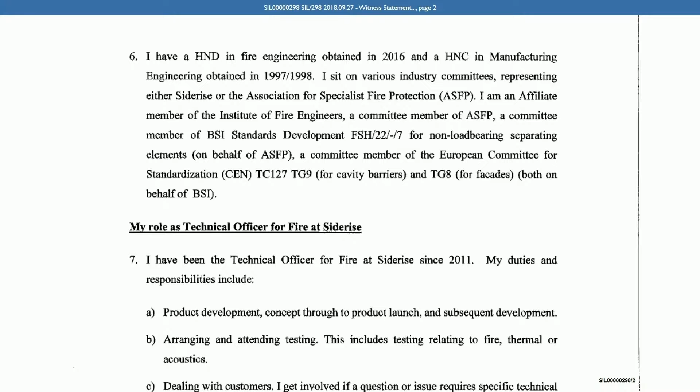Now, if we go back to page 1, paragraph 4 of your witness statement, you tell us that you started in the facade industry in 1998, working for Denver Aluminium Limited. Is that correct? That's correct. And what was your role there? I was a facade designer.

And then in 2000, you moved to Vision Aluminium Limited as a facade design manager. Is that correct? That's correct.

And were you involved in any fire testing in those roles when you were the facade design manager? At Denver, no. When I worked for Vision Aluminium, I was trained at Schuco Facades as being able to design their fire facade system, which was a curtain wall system. And how do you spell Schuco Facades?

SCHUCO, yeah. And then in 2002, you joined Siderise as the product manager and marketing manager for the technical and commercial departments. Is that correct? Yes. Can you explain what that role involved?

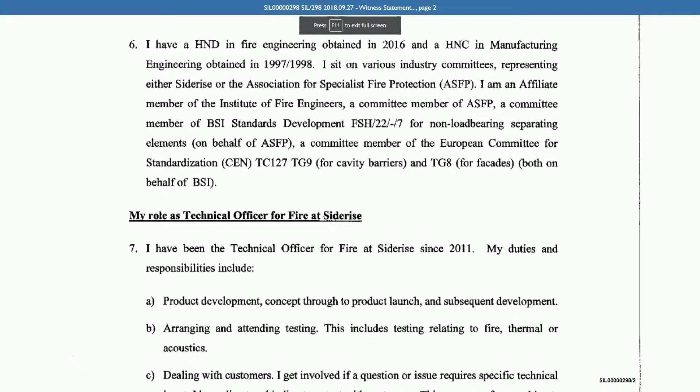And then at paragraph 7, you tell us what your role as technical officer for fire at Siderise has involved, and you describe that role as including product development, arranging and attending testing - including testing relating to fire, thermal or acoustics - and also dealing with customers. You say you get involved if a question or issue requires specific technical input.

Are you still in that role as technical officer for fire at Siderise? The role has evolved. I'm now technical development director for Siderise. When did you take up that appointment? Last January, in 2020.

Did you write or assist in writing any of the marketing literature or installation guidance that Siderise published for its cavity barriers? I would have technically reviewed the documents. So you do a technical review of those documents. Correct.

Just some questions about previous cladding fires. At the time you were involved in the Grenfell Tower project in 2015 - we'll come to that later - were you aware that there was a long history of external cladding facade fires on high-rise residential buildings, both in the UK and internationally? I was aware of some UK fires that led to the authoring of BR 135 and the development of BS 8414. I was also aware of some fires overseas.

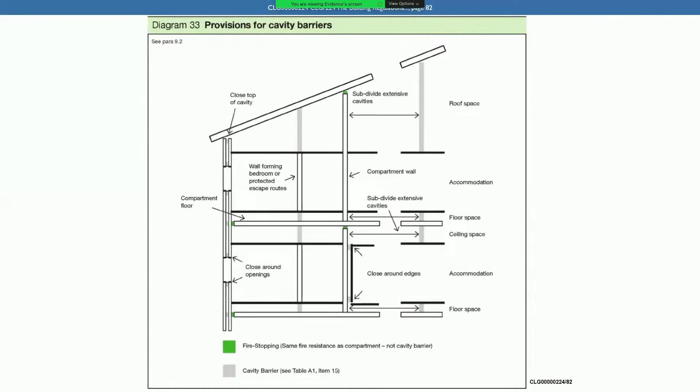If we go to CLG 00000224 at page 82, here we have diagram 33 from section 9 of Approved Document B, dealing effectively with compartmentation. We can see various shaded parts on this diagram, including some green indicating fire stopping, and some grey shading indicating cavity barriers. Can I take it you were familiar with this guidance when you were technical officer for Siderise from 2011 onwards? Yes. And under the key to the diagram, where it says cavity barrier at the bottom, there's a reference to table A1, item 15, in Approved Document B.

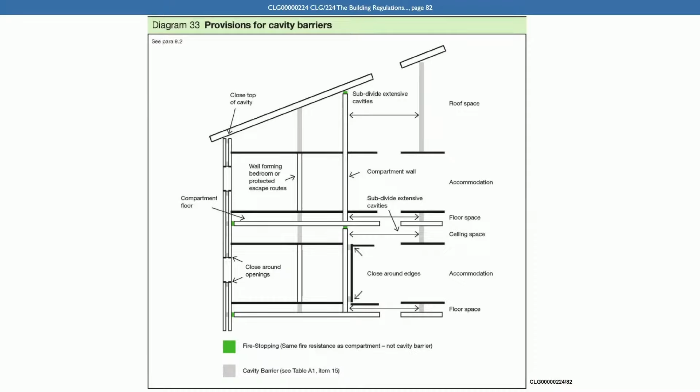I just want to go to that table now. It's at page 124 of ADB. So this is table A1 - we can see the title in green at the top: specific provisions of test for fire resistance of elements of structure, etc. Again, can I take it you were familiar with this table at the time you were technical officer? Yes. Effectively what we see is various different parts of the building, and the table tells you what the fire resistance elements need to be for those parts of the structure. That's correct, isn't it?

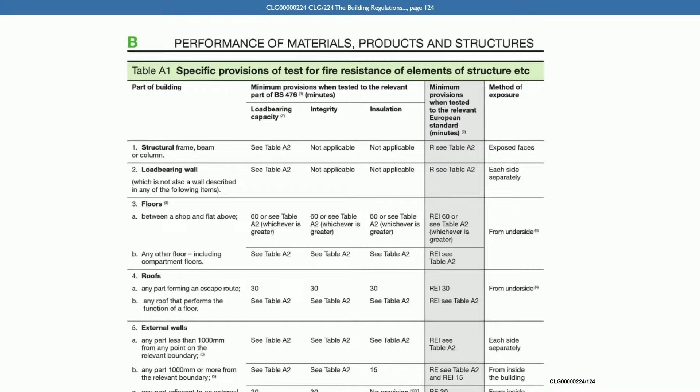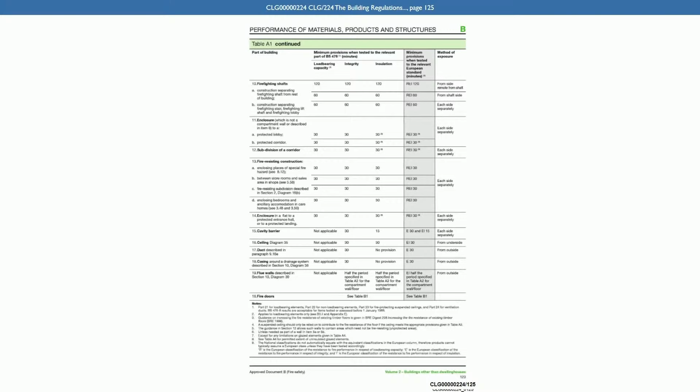Yes, it is. If we go over the page, we can see at the top it says part of building, and then the heading minimum provisions when tested to the relevant part of BS 476. There's a little footnote, which we'll come back to. It also makes clear in brackets that the figures we're seeing here are in minutes. That's correct, isn't it? Yes, it is.

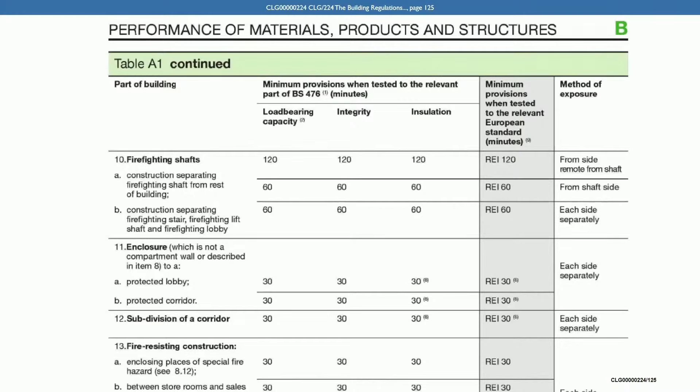And then if we go down to item 15 in this list, we get the reference we saw earlier in diagram 33, taking you to cavity barriers. We can see there, as well as at the top of the page, that cavity barriers need to have 30 minutes integrity and 15 minutes insulation. That's correct, isn't it? Yes, it is.

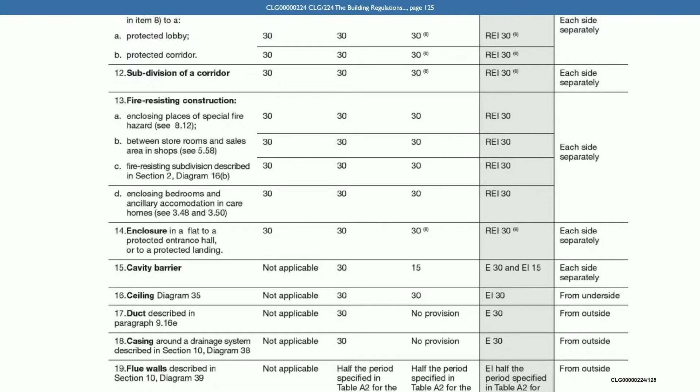Yes, thank you. So you can see the load-bearing capacity column isn't applicable because cavity barriers are not load-bearing, are they? No, they're not. And so the requirements of ADB were 30 minutes integrity, 15 minutes insulation. And then that footnote at the top, which relates to the part of BS 476 that's applicable, if we go down to that footnote 1 at the bottom of this page,

we can see in the notes there, number 1, what it does is it tells you which parts of BS 476 may be applicable. You've got part 21 for load-bearing elements, part 22 for non-load-bearing elements, 23 for fire protecting suspended ceilings, and 24 for ventilation ducts. Do you see that there?

Yes, I do. Now it's right, isn't it, that BS 476 part 20 is the general British standard, which sits with those ones listed there. And that contains general principles relating to the method of determining the fire resistance of elements of construction. Yes, part 20 is the parent test document, and then these are supplementary standards for testing supplementary elements. Yes, thank you. They refer back to part 20. Yes, thank you. That's very helpful.

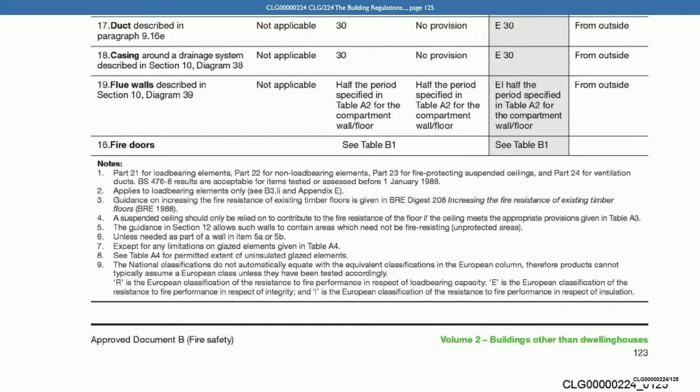Part 22 for non-load-bearing elements, would there be any aspects of that which you would consider relevant to the testing of cavity barriers? Not particularly, because it's dealing with roller shutters and partitions. When I mean partitions, we mean partition walls rather than small elements. The pass/fail criteria in part 22 is referred back to part 20 for the insulation and integrity. It's the same within the EN suite of test standards. They refer back to the parent EN 1363 part 1.

Yes. So we'll come on to see in some of the test reports the way in which the principles in the tests you just explained have been used in the testing of cavity barriers, yes? Yes. Now, just to help the panel and anyone else watching, I want us to be very clear what is meant by integrity and insulation, as we saw in that table. Is it right that integrity, in crude terms, is the ability to contain fire and stop flames and hot gases from physically passing the material in question?

That's correct. A more technical definition, which we see in BS 476 part 20, would be the ability of a specimen of a separating element to contain a fire to specified criteria for collapse, freedom from holes, cracks and fissures, and sustaining flaming on the unexposed face. Do you agree with that?

Yes. And then in contrast, where we talk about insulation, in crude terms, that's about the thermal transmittance of heat, isn't it? And the material's ability to prevent the passage of radiant heat. Yes. And in technical terms, it's described in BS 476 part 20 as the ability of a specimen of a separating element to restrict the temperature rise of the unexposed face to below specified levels. Again, can we agree on that? Yes, we can.

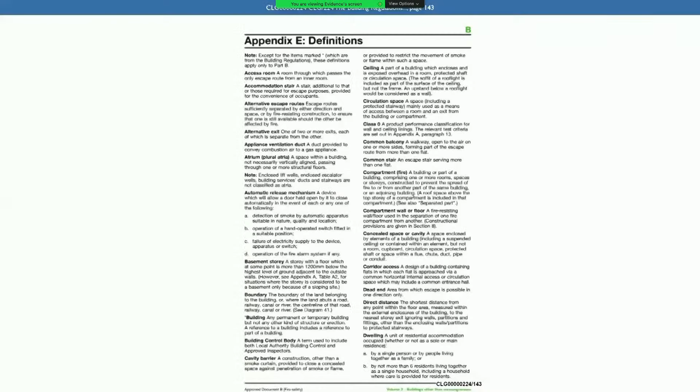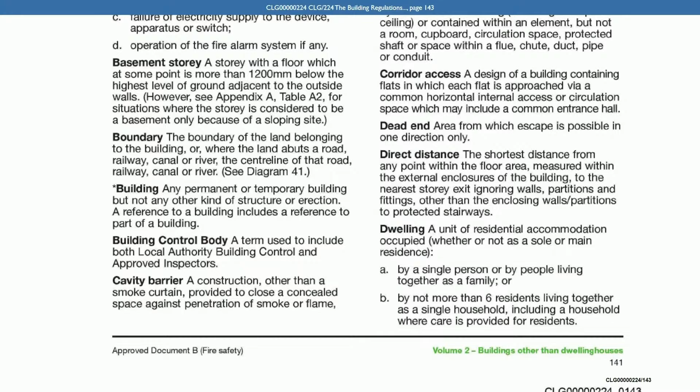This is Appendix E of Approved Document B, where we see some definitions. And I just wanted to draw attention to, at the bottom of that first column, can you see there's a definition there of cavity barrier? Yes. And it says a construction other than a smoke curtain provided to close a concealed space against penetration of smoke or flame. And then if we go up to the top, or provided to restrict the movement of smoke or flame within such a space.

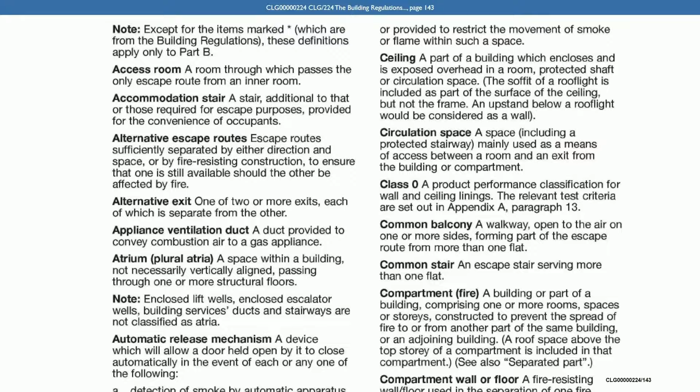Do you see that? Yes. And again, were you familiar with that definition while you were technical officer? Yes, it was. Now, I'm going to ask you in detail in the next section of my questioning about the testing which Siderise carried out on its open state horizontal cavity barriers, those with an intumescent strip. But before we do that, I just want to remind the panel and the listeners exactly what these barriers are.

If we can go to Dr. Lane's phase 1 report, this is BLAS 8, page 42. And here we have two helpful figures. We can see at the top at figure 8.45, this is one of the horizontal intumescent cavity barriers as installed at Grenfell Tower, yes? Yes, looking at the picture, yes. Yes. And we can see an extract from Siderise's product literature just below that in figure 8.46. And again, that is an open state horizontal cavity barrier, yes?

Yes, it is. And I just want to be absolutely clear what these are. So you can see it from the label in the top picture. It states there in the label, black weather-resistant polymer film encapsulating leading edge, continuous high-performance intumescent strip installed behind this film. So is it right that at that leading edge, what you get with these barriers is a high-performance intumescent strip, yes? Yes, it is. And the purpose of that strip, is this right, is that upon heating, that strip expands to fill a gap that has otherwise been left within the cladding system?

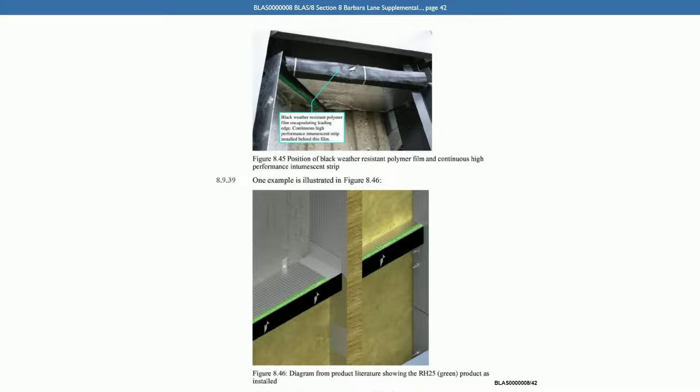Yeah. Now, as I've said, I'm going to focus a lot of my questioning this morning on the testing of these open state cavity barriers, these intumescent cavity barriers. At this point, can we just look at Mr. Swales's witness statement to the inquiry? This is at SIL 306. Can you just confirm that Mr. Swales is the Chief Commercial Officer at Siderise, yes? Yes, that's correct. And this is his witness statement to the inquiry. And he tells us in this statement that he's been Chief Commercial Officer at Siderise since 2013. For the transcript, that's at paragraph 5 on page 2. I want to look first with you at page 11, paragraph 44.

So he says, prior to 2006, Siderise's cavity barriers were verified by the Loss Prevention Council. We'll come back to that in a moment. And he says the use of rain screen was still relatively uncommon in the early 90s. Consequently, the demand for dedicated cavity barrier products was infrequent/negligible. Due to the paradox of cavity barriers needing to be installed with an air gap to maintain ventilation versus the integrity criterion required for compartmentation, the advice at the time from the Loss Prevention Council was that it was not possible to satisfy both requirements.

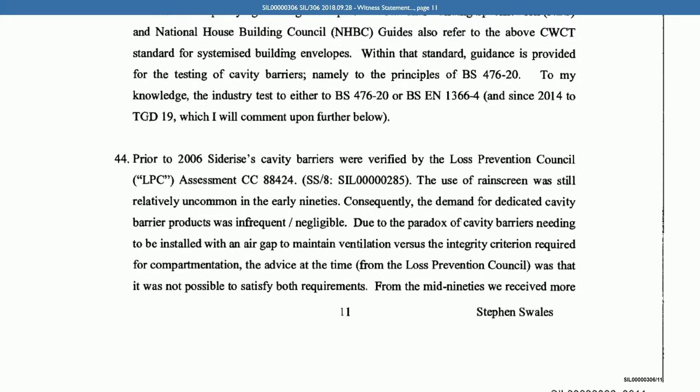And then he says, from the mid-90s, we received more inquiries for this type of application. And he says, as such, in July 1997, I requested that the LPC, the Loss Prevention Council, confirm their position. And then he refers to a document, which I'll take you to in a moment. This was used to support the use of an ad hoc assembly with standard cavity barriers fitted to leave a 25mm gap. From this time to 2002, from recall, there were a small number of projects, literally one or two, where we supplied product for a, quotes, rain screen application.

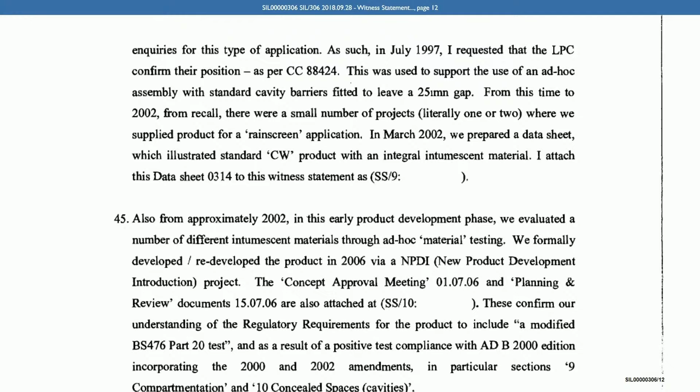And then he goes on, in March 2002, we prepared a data sheet which illustrated standard CW curtain wall product with an integral intumescent material, and he attaches that data sheet. And then if we go on and read from 45, he says also from approximately 2002, in this early product development phase, we evaluated a number of different intumescent materials through ad hoc material testing. Now, just pausing there, is it right that from around 2002 onwards, when you first joined Siderise, the company was beginning to develop open state cavity barriers for use in rain screen applications? Yes.

And based on your own involvement in the industry in the mid-90s, were you aware of a growing demand for such a product? In the mid-90s, I was involved with predominantly curtain walling. The companies I worked for, we were curtain wall specialists, not rain screen specialists. I see. So approximately when did you start to become aware that there was a growing demand for open state cavity barriers in the market? When I joined Siderise. Were you aware, after you joined Siderise, that Siderise had sought advice from the LPC, the Loss Prevention Council, about these open state cavity barriers? Yes, I was.

We're going to go to that letter from the LPC in a moment. But just before we do that, we saw in the first sentence of paragraph 45 that Mr. Swales was referring to ad hoc material testing of different intumescent materials. Can you help us? What, if any, involvement did you have in such ad hoc testing of those intumescent materials? Very little in the very early days. It was more 2006 onwards, I was more involved with testing. Right. So do you know much about what that ad hoc testing was of different intumescent materials? Not in the very early development phase. Okay.

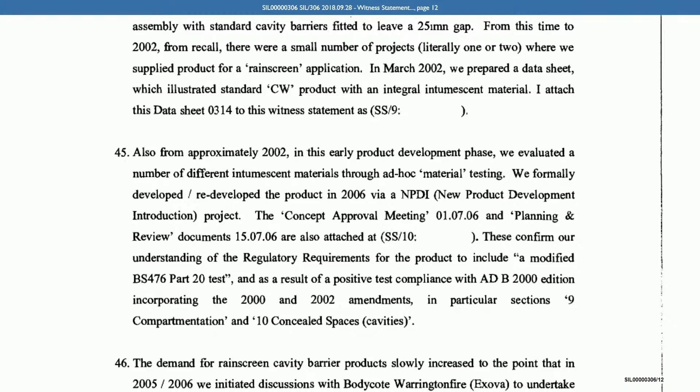Now, if we go back to Mr. Swales' witness statement, looking at paragraph 45 on page 11. In the second sentence of paragraph 45, he says, we formally redeveloped the product in 2006 via an NPDI, New Product Development Introduction Project. And he goes on to say that there was a concept approval meeting on the 1st of July 2006. Can we just look at the agenda for that concept approval meeting? It's SIL 402586. Now we can see there the heading and the date, 1st of July 2006 on the right-hand side. And we can see that the meeting was called by you, and you appear to be the note taker as well, yes? Yes.

And the attendees included Steve Bond, Technical Director, and Chris Mort, Technical Manager. Was it just the two of you at this meeting? Yes, it was. And we can see from the agenda topics that you were responsible, we can see the initials CM, for application description. That's the second one down. And then in the fourth one down, statutory regulatory requirements has also got your initial next to it. Is that correct? Yes, it does. So were you responsible for the statutory and regulatory requirements around this new product development? Yes.

And then if we turn to page 2, we can see that there's a heading there, agenda topics, and underneath that there's a heading product concept name, and then there's various notes under the discussion, so these appear to be minutes of the meeting. Now the rest of these minutes appear then in a different document. If we turn to SIL 402587, would you agree these appear to be a continuation of the minutes of that meeting? Yes, they do. Thank you.

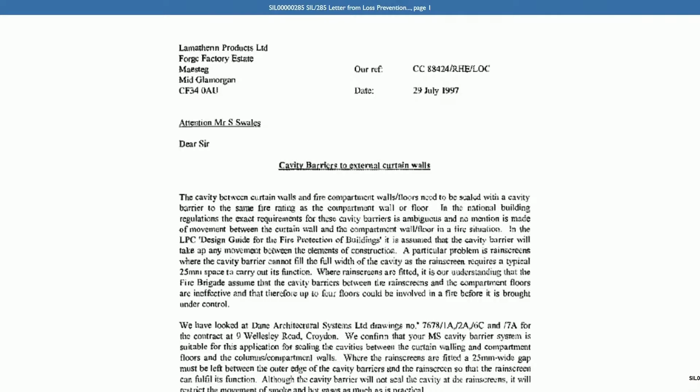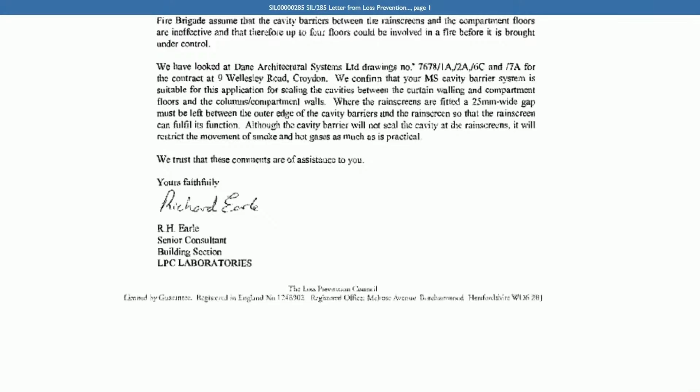Let's turn now to the Loss Prevention Council letter that Mr. Swales referred to in his witness statement. This is SIL 50285. So this is a letter dated 29th of July 1997 that was sent to Mr. Swales. And if we could just see back at the bottom, the author of the letter is somebody called R.H. Earle, who's a senior consultant at the Loss Prevention Council. And I just want to read the first paragraph at this stage.

So the author says, the cavity between curtain walls and fire compartment walls, floors, need to be sealed with a cavity barrier to the same fire rating as the compartment wall or floor. In the National Building Regulations, the exact requirements for these cavity barriers is ambiguous, and no mention is made of movement between the curtain wall and the compartment wall or floor in a fire situation. In the Loss Prevention Council design guide for the fire protection of buildings, it is assumed that the cavity barrier will take up any movement between the elements of construction.

Then it says this: a particular problem is rain screens, where the cavity barrier cannot fill the full width of the cavity, as the rain screen requires a typical 25mm space to carry out its function. Where rain screens are fitted, it is our understanding that the fire brigade assume that the cavity barriers between the rain screens and the compartment floors are ineffective, and that therefore up to 4 floors could be involved in a fire before it is brought under control.

Now, just pausing there, when it states that the rain screen requires a typical 25mm space to carry out its function, is that because in some rain screen systems, it would need to be able to allow the drainage of water behind it and to provide ventilation to the system? That's correct. Now, as to that information about how the fire brigade viewed cavity barriers and their effectiveness in a rain screen system, can you help us? To what extent was that taken on board by Siderise when developing its products?

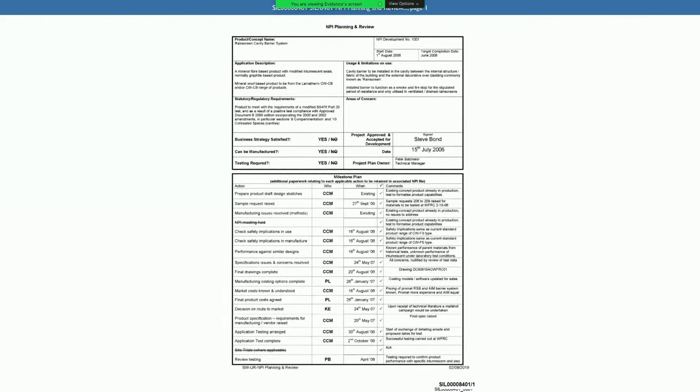Yes, thank you. Now, just sticking with this new product information planning, if we can turn to a document SIL 408401. This is a NPI, New Product Introduction Planning and Review sheet, dated the 15th of July 2006. Now, do you remember completing this document? Yes, I do.

And if we look at the project owner, it had changed to Peter Batchelor. Yeah. This was finished when I had left the business. I see. So you began this and then he finished it off? Yes. When you moved to Hilti, yes? Correct. And then we can see identical wording on the left-hand side, third box down, under statutory regulatory requirements, product to meet with the requirements of a modified BS 476 Part 20 test. And as a result of a positive test, compliant with Approved Document B 2000 edition, and then it refers to particular parts of that.

Had you done any further investigation between the concept approval meeting and completing this planning and review document as to the suitability of doing some modified BS 476 Part 20 testing? There was discussions between ourselves and Warrington Fire on how we could test a cavity barrier with an intumescent with a 25mm gap. So yes. And can you help us, who were you having those discussions with at Warrington Fire? It would have been with Chris Johnson at the time. I see. So you'd been having some discussions with Warrington Fire about how you could use parts of the BS 476 Part 20 test principles in a test of these intumescent cavity barriers. Yes.

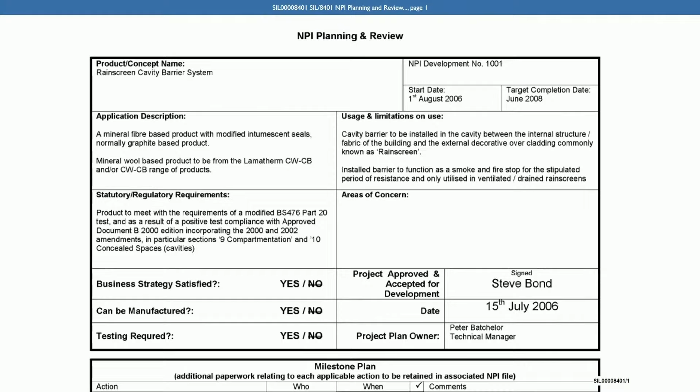And if we just look at this point at your witness statement, paragraph 38, page 10 of your statement. I think we probably already covered this, but you state, 4 lines down, testing to BS 476 Part 20 has been established for many years, though it was recognised as not being ideal, as the standard cannot be applied directly to open state cavity barriers. And that's for the reason that we've already discussed, is it, that under Part 20 of 476, these open state cavity barriers would automatically fail certain requirements?

Yes, it's the gap gauge issue. The intumescents react on a furnace test very, very quickly, within 10 to 20 seconds of ignition of the furnace. So it's that initial, before you start the furnace, you have an open gap. So technically, you shouldn't start the furnace with an open gap, because of the health and safety condition requirements. Yes, I see. And we're going to come on to look at some of the test reports in a moment to see what data you were getting from that.

Mr. Swales says in his witness statement, we don't need to go to it, but for the transcript, that's at paragraph 39, that to his knowledge, Siderise were the first in the industry to test open state cavity barriers. Is that your understanding as well? Yes. So when you were doing this, there was no precedent for testing open state cavity barriers when you were embarking on this project? Not that I was aware of.

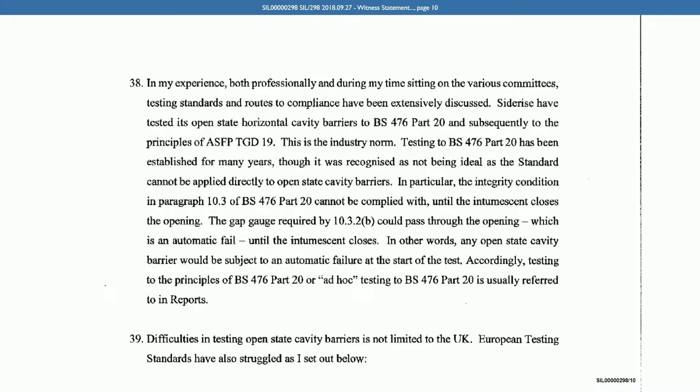I can't particularly recollect any specific discussions. Did you ever, or can you recollect ever having any discussions with anybody within government or anybody who was responsible for Approved Document B about how satisfactory it would be to test in this ad hoc way? No.

So does it follow that you were reliant on the advice you were getting from Exova in testing in this way? That's correct. Yes, thank you.

And if we can look back now at Mr. Swales's witness statement, paragraph 46 on page 12. He tells us there in the first lines, he says the demand for rain screen cavity barrier products slowly increased to the point that in 2005, 2006, we initiated discussions with Bodycote, Warrington Fire, Exova to undertake product testing.

Now, were you personally involved in those discussions? Yes, I was. And he goes on, picking it up in the third line: it took a lot of discussion with Exova to undertake the test, as they were nervous that they could safely permit the testing of an open assembly. And then he goes on, there was no precedent to this test and it was considered ad hoc. And then we're going to look at some of these test reports in a moment.

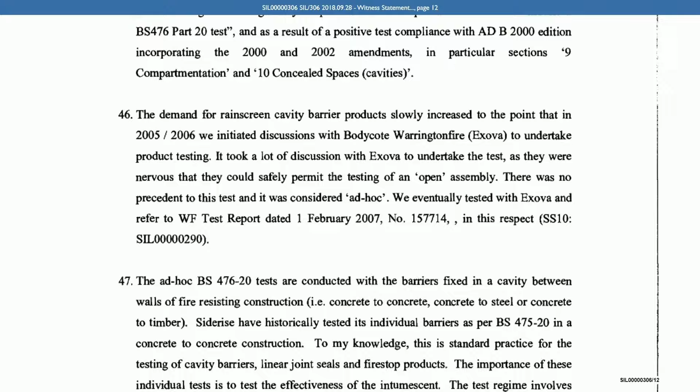Did they ever express any concerns about whether it was appropriate to be testing in this ad hoc way using principles of 476 part 20? It's common to test to use part 20 or EN 1363 part 1 for a test that doesn't fall into one of the other prescribed test standards.

So it's common, yes, I understand that's your evidence, but my question was, did Exova ever express any concerns about whether it was appropriate to be testing in this ad hoc way using the principles of 476 part 20? None at all. So they were entirely comfortable to go ahead with this testing, apart from the health and safety aspects? That's correct.

Well, did anyone from Exova ever express any concern that they didn't want to be seen to be endorsing the safety of open state cavity barriers in circumstances where there was no accepted test for such a product? No.

Now, in a moment, we're going to come to look at a number of the test and assessment reports which were produced for these open state intumescent horizontal cavity barriers by Exova and later by some others. But before we do that, I want to put a number of propositions to you to see what we can agree at this stage. Can we agree that prior to Siderise manufacturing and supplying open state horizontal cavity barriers for use on Grenfell Tower, those products had only ever been tested for insulation and integrity between two concrete lintels or concrete blocks? We are looking at testing an element of material.

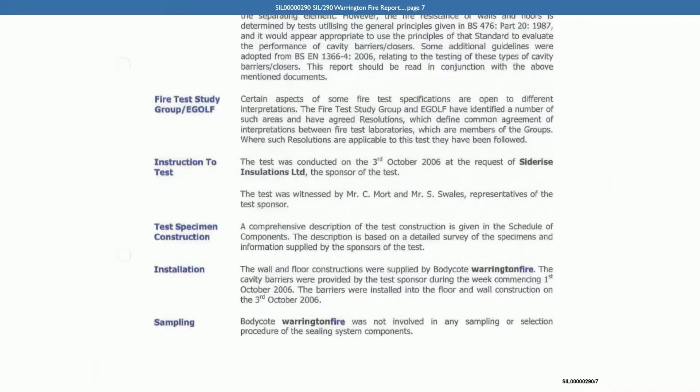And if we can turn back to page 3, there's a section summary of the tested specimens. Here it's explaining what was being tested in these tests.

If we look at the 4th paragraph down, it tells us that specimens C and D, reference Lamatherm CWRS, comprised a mineral fibre based insulation with polyethylene fibre reinforced aluminium foil facings, and had overall dimensions of 225 millimeters wide, 1000 millimeters long, and 75 millimeters thick.

And then it said specimen C, complete with a graphite based intumescent strip retained to one edge of the primary seal by folded returns of support brackets that penetrated the full width of the specimen, and specimen D, complete with a Palusol based intumescent sheet retained to one edge of the primary seal.

So in this description, it's right, isn't it, that it was specimen C and D that were the open state cavity barriers with intumescent strips, yes?

Yes, that's correct. And that's in contrast to specimens A and B, just to note above that, in the paragraph immediately above, they were directly bonded to the damp-proof course and friction fitted, yes? Yes.

And we can see, I read out the dimensions of the intumescent cavity barriers in that 4th paragraph, 225 millimeters wide, 1000 millimeters long, 75 millimeters thick.

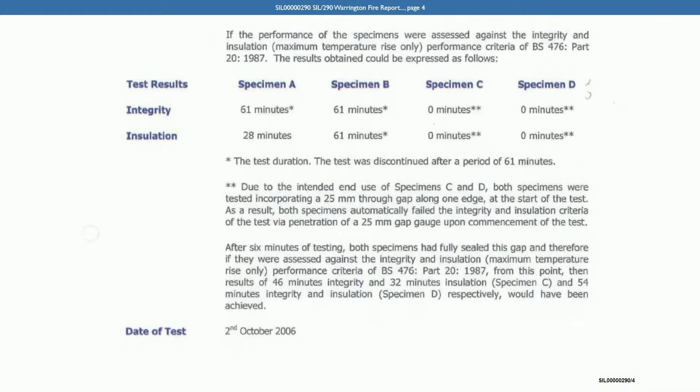And we can see what the performance was that they achieved. And then if we can look at page 28 of the report, we can see there's some limitations. Mr. Chairman, if I can just cover these limitations in this report, perhaps then we could break.

Yes, that's right. So at page 28, we can see at the bottom, it sets out ongoing limitations, and we can see at paragraph 1, it states the results relate only to the behaviour of the specimens of the element of construction under the particular conditions of test. They are not intended to be the sole criteria for assessing the potential fire performance of the element in use, nor do they reflect the actual behaviour in fires.

And then we can see in the next paragraph, it says the results may not be applicable to situations where the joint widths, orientations and supporting construction vary from those tested. And then in the third paragraph, it says, as no movement was induced into the specimens during the test, there can be no evaluation of the performance of the seals where movement is induced in a building under actual fire conditions. So can you just help us, what did you understand that last limitation to mean?

It's a standard clause. It's a standard clause in fire tests, even now. You're testing to get the performance of the element in isolation. It needs further assessing, as it says there, the fire performance of all the elements put together.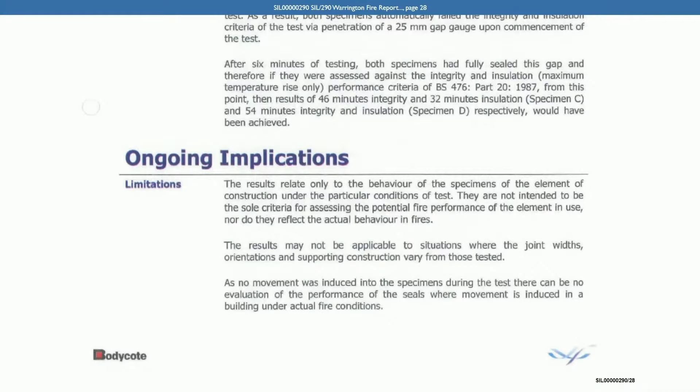Right, I see. And then just to complete what we can see in this report for our purposes, if we go to page 29, the next page at the top of the page, under review, it makes clear that this report covers a test which was conducted to a procedure which is not the subject of any British standard specification, but it utilised the general principles of fire resistance testing in 476 part 20. And it also refers there, and you mentioned this standard earlier, the European equivalent, BSEN 1366. Actually, that's part 4 on linear joint seals, isn't it?

Yes. And is it right that in this test, you used the thermocouple locations from the BSEN 1366 part 4 for linear joint seals?

You use the thermocouple locations on top from that standard, and the heating from BS 476 Part 20, and then you adapted the procedures from the two different standards for this test? We didn't adapt any of the procedures because we do not run the test. Warrington Fire run the test.

We only witness. In terms of thermocouples attached to the product, the thermocouples for EN attached to the product are a copper disc with wires attached and a non-combustible pad of about 30 millimeters square. They are the same or similar to the BS 476. So really, there isn't any difference between the two measuring thermocouples.

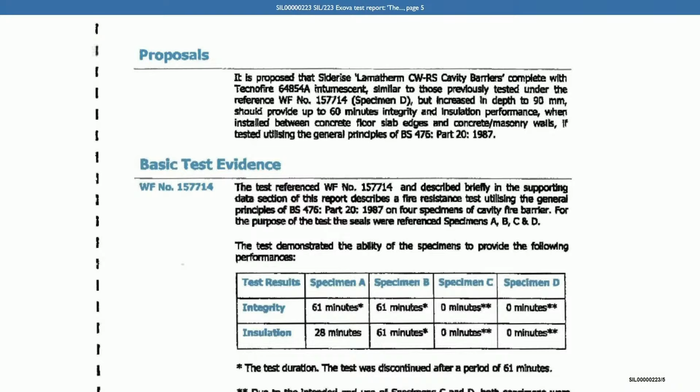Yes? Yes. So again, with this assessment report, it's premised on the basis that the product was held between two concrete slabs, yes? For testing, yes. Yeah. And if we turn to page 7, we can see the report's conclusions. And the basic conclusion was that should the recommendations given in this report be followed, it can be concluded that those cavity barriers, complete with the Tecnofire intumescent, should be capable of providing up to 60 minutes integrity and insulation performance if subjected to a test utilising the general principles of BS 476 Part 20.

And again, the little asterisk caveats this and makes clear that it's after closure of the 25 millimetre wide air gap has occurred. And in brackets, it says after approximately 4 minutes, yes? Yes. So the report is not assessing integrity or insulation performance prior to the 25 millimetre gap being closed, no? No. And again, the report contains a caveat.

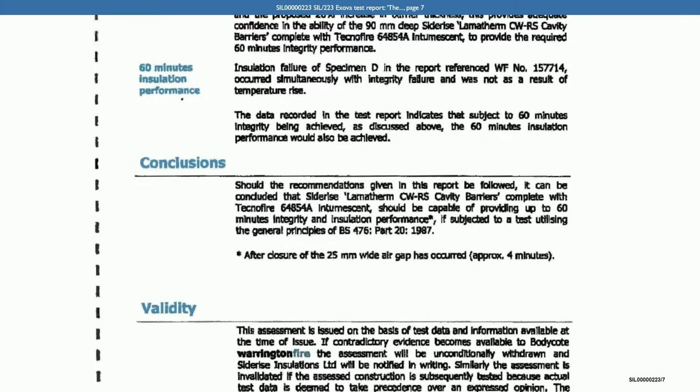If we go to the very last sentence on page 7, under validity, it says the appraisal is only valid provided that no other modifications are made to the tested construction other than those described in this report. So that's an assessment report that's obtained in 2009. Let's move now to another test report. This is SIL 00000224.

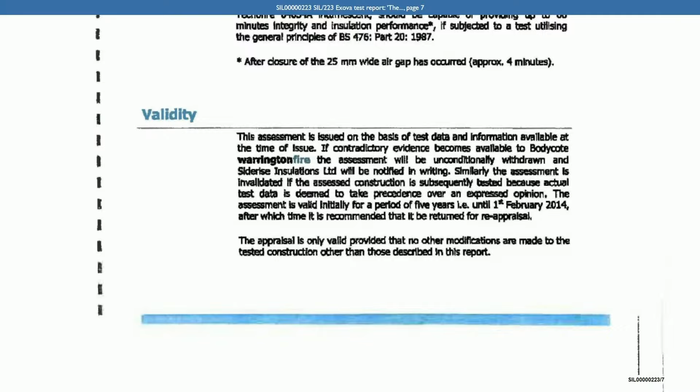And we can see from the title there on the right-hand side, this is fire resistance test utilising the general principles of BS 476 Part 20 on 5 specimens of floor-mounted linear gap seals. And we can see it's dated the 26th of August 2010. And so it would appear that Siderise had commissioned further testing to the principles of BS 476 Part 20, which led to this report being produced. Is that right? That's right.

And if we look at page 2 of the report, under test results, if we zoom in there, we can see that 5 samples were tested. Specimen E at the top there, we can see that that was installed into the cavity on 3 brackets, reference prototype RS, leaving an air gap of nominally 50 millimeters. Do you see that there? Yes. And then specimens F, G, H, and I are all described below that. And they had an air gap of nominally 25 millimeters, yes? Yes. So you're testing the barriers with different widths of air gap, is that correct? That's correct.

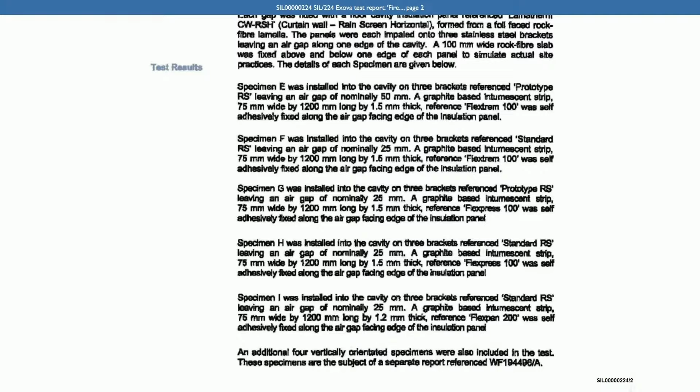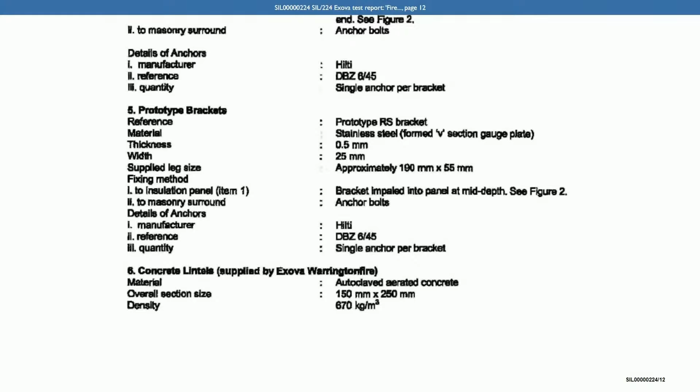And turning just to page 12, we can see at the bottom of page 12, at item 6, again, the apparatus used in this test included concrete lintels, autoclaved aerated concrete, yes? Yes. And then if we turn to page 23, we can see a table of results. So here we can see that all the specimens, when they've been tested to BS 476 Part 20, have got 0 minutes integrity and 0 minutes insulation, and there's an asterisk.

And we can see in the paragraph below the table, in the first paragraph, if we could just go down the page a little, thank you. It says there, due to the intended use of specimens E to I, the specimens were tested incorporating a through gap along one edge of between 25 millimeters to 50 millimeters at the start of the test. As a result, the specimens automatically failed the integrity and insulation criteria of the test via penetration of a 25 millimeter gap gauge upon commencement of the test. So exactly the same as last time, yes? Yes.

And then if we look at the final paragraph below that, it states this: it says between 2 and 3 minutes, specimens G, H and I sealed the gaps. And therefore, if they were assessed against the integrity and insulation, maximum temperature rise only, performance criteria of BS 476 part 20 from this point, then the results are 61 minutes integrity and 23 minutes insulation for specimen G, 61 minutes integrity and 20 minutes insulation for specimen H, and 61 minutes integrity and 27 minutes insulation for specimen I respectively would have been reported.

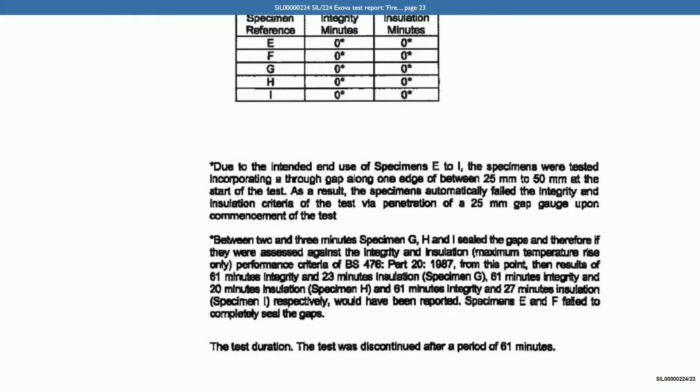Yes, I understand. And then if we go over to page 24 of this test, we can see that exactly the same limitations and disclaimer are placed here by Warrington Fire as before. The results relate only to the behaviour of the specimens of the element of construction and not intended to be the sole criteria for assessing the potential fire performance. And then the results may not be applicable to the situations where the joint widths, orientations and supporting construction vary from those tested. And then it's making clear in that final paragraph under limitations that there was no movement and therefore it can't be evaluating the performance where movement is induced in a building under actual fire conditions, yes?

Yes, those are standard clauses in all test reports. Yes, I understand they're standard clauses, but they're pretty important clauses, aren't they, nonetheless? They're standard clauses in the test reports. You are testing that single element, that single item. Yes. It needs to be further assessed, as I said previously, by a project fire engineer who takes the fire resistance properties and fire reaction properties of all the elements being used in the construction to come up with the correct product. Yes. Can we agree that they're important limitations?

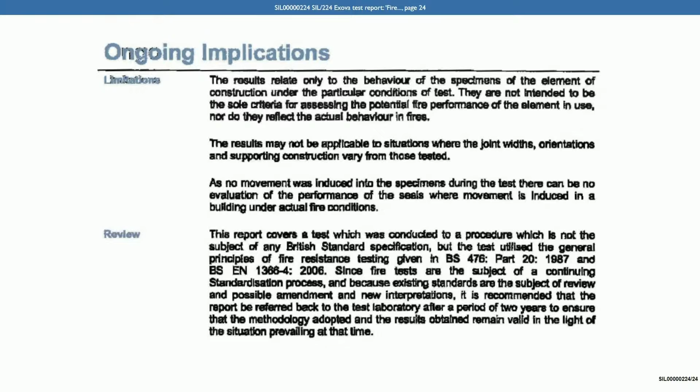Yes. And then in the fourth report, if we go to this now, this is from September 2011. If we look at SIL00000211, under the title, we can see on the top right-hand side, the title is the fire resistance performance of Lamatherm rain screen fire barriers. And we can see below that this is an assessment report again. And we can see it's dated the 20th of September 2011. Now, again, have you seen this report before and are you familiar with it?

Yes. Were you involved in commissioning this report? Yes. And again, it's an assessment report, isn't it? Not new testing, but an analysis and extrapolation based on evidence presented to Exova. Yes. And if we go to page 3, next to objective, what it's saying as the objective for this assessment report is that it considers the expected fire resistance performance of Lamatherm rain screen fire barriers similar to those tested under the references. And those are the two test reports, the first from 2007 and the second from 2010 that we've just been looking at, yes? Yes.

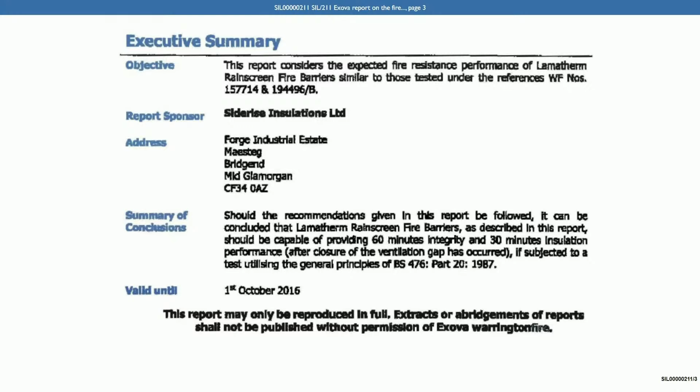And on page 4, we can see the assumptions that this report is based on. And next to supporting construction, it says it is assumed that the assemblies that the cavity fire barriers will be fitted to elements of construction that have at least 60 minutes fire resistance performance in accordance with BS 476 part 21 and 22. So there it's making an assumption that the assemblies that they're going to be fitted to will have at least 60 minutes fire resistance performance, yes? Yes.

And next to installation, 2 down from that, it says it's assumed that the barriers will be installed by competent installers in a professional manner. And then it says the use of third-party certified installers is recommended. Do you see that? Yes.

And it also says it's also assumed that the gap between the end of the barrier and the element of construction is no greater than 25 millimeters, yes?

Yes. And then next to rain screen, below that, it says this report does not consider the fire resistance performance of the rain screen element or whether fire spread may occur as a consequence of collapse or failure of the rain screen. The approving authority or regulator should decide whether it is necessary for the rain screen to be, quote, fire rated, whether it is of an appropriate construction and whether separate test or assessment evidence is necessary.

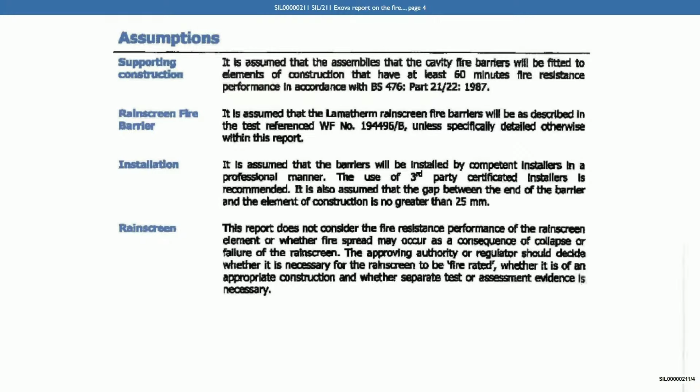Now, were you aware of that caveat at the time in this report? Yes. And if we can turn to page 7 of this document in the top paragraph, we can see it says, it should be noted that due to the performance criteria of the standard, the opening included at the start of the test must result in integrity and insulation failure, irrespective of how quickly the gap was closed, and the approving authority or regulator should therefore consider the acceptability of this situation.

Now, we've seen 2 references there to the approving authority or regulator in this test assessment. Who did you understand to be the approving authority or regulator in this context? On a project where product is supplied, there can be approval by the project fire engineer, could be approval by local building control, could be approval by other consultants. They're responsible for assessing every element. So if you had 5 different manufacturers of 5 different components, it's their responsibility to assess all 5 components to ensure that it meets with the fire strategy.

Yes. Was it Siderise's practice to bring these caveats to the attention of fire engineer or building control officers on projects that it was involved with? We have, yes. When you say we have, does that mean it was your practice to do that as a matter of course? Whenever we were in discussions with a fire engineer, it's a case of this is the product test information. You need to satisfy yourselves that it's suitable for the construction on site, because we're not in control of what is being installed into.

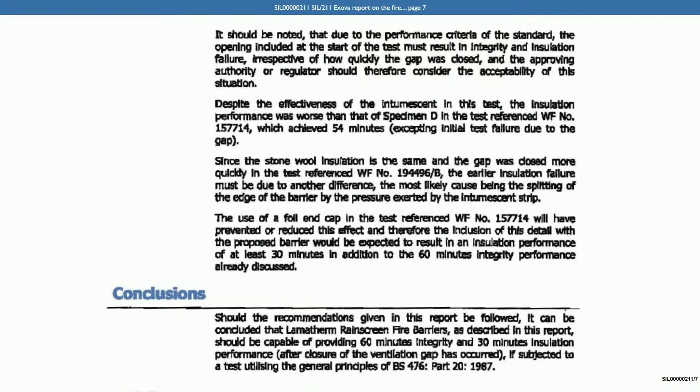Yes. Can we just look at, I want to put 2 pages on the screen side by side from the test reports 2007 and 2010. If we could pull up the 2007 test report, this is page 4 of SIL00000290. Yeah, so if we can have that. And then on the other side of the page, if we can have the 2010 test report at page 3, SIL00000224, page 3. Yes, and it's the last paragraph on both of those pages that I'm interested in.

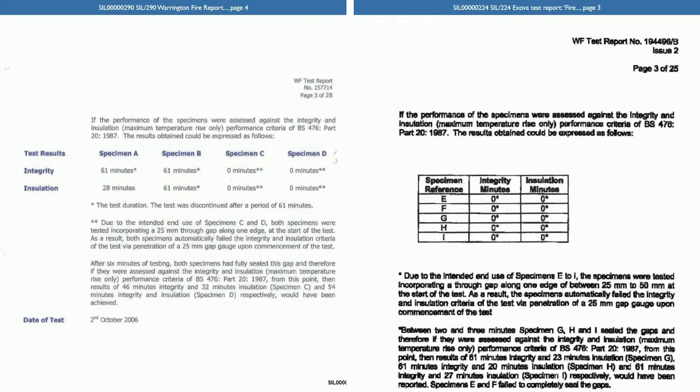So if we look first at the 2007 report on the left-hand side, we can see at the bottom paragraph of the page, the report set out that after 6 minutes of testing, we can see that specimen C has achieved 46 minutes integrity and 32 minutes insulation. And then it's got 54 minutes integrity and insulation, so 54 for both. It's specimen D.

Yes. And then if we look on the right-hand side in the 2010 test report, in that bottom paragraph, we can see that specimen G, this is about halfway down, where it starts saying the results of 61 minutes integrity and 23 minutes insulation. That's specimen G. 61 minutes integrity and 20 minutes insulation, specimen H. And 61 minutes integrity and 27 minutes insulation for specimen I. So those are the figures.

Now, we can see that for insulation, the results were much better in the first test. And for integrity, the results were much better in the second test, yes? Yes. And so is it right that in its assessment report from 2011 that we've just been looking at, Exova combined the favourable integrity results from the 2010 test report, the 61 minutes, with the favourable insulation results from the 2007 test report, 32 and 54 minutes, to conclude that Siderise open state cavity barriers would achieve the 60-30 for integrity and insulation, yes?

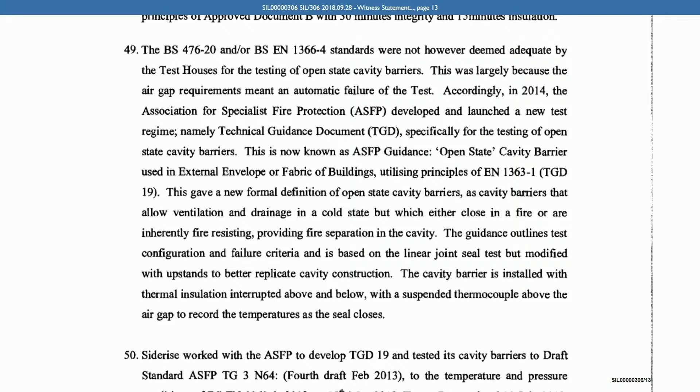Yes, we will go to it in a moment. Mr. Swales goes on to say, at paragraph 50, Siderise worked with the ASFP to develop TGD 19 and tested its cavity barriers to draft standard ASFP TG3 N64, 4th draft February 2013, to the temperature and pressure conditions of BS EN 1363 Part 1 2012 on the 15th of May 2013, and then he gives reference to a Warrington report.

Now, were you personally involved in developing TGD 19? As part of the technical working group for ASFP, yes, along with 11 other members.

And I think that standard that I just read out, BS EN 1363 Part 1 2012, that's the European equivalent of BS 476 Part 20, setting out the general requirements for fire resistance tests, yes? It's a higher standard than BS 476 Part 20.

But if you have a product that is tested to BS 476, you cannot assume it will pass a BS EN 1366 test. If you've got a product that's tested to EN 1366 or similar, then it should pass the BS 476 due to how the furnace temperature is recorded and controlled. In BS 476, it's a simple bare wire.

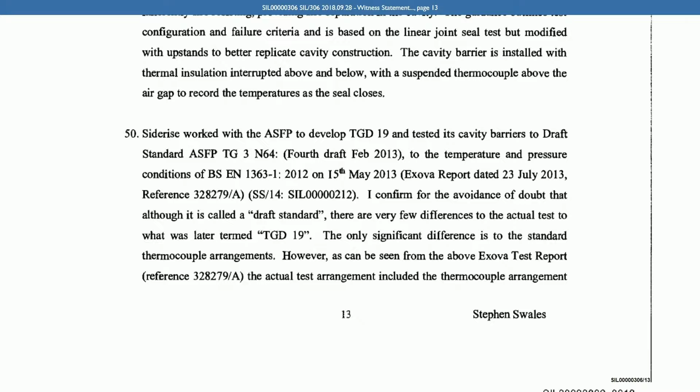In EN standards, there is a thermocouple that is a 100mm square steel plate with a 10mm calcium silicate board, and sandwiched between the steel plate and the calcium silicate board is the bare wire thermocouple. So the amount of energy needed in the first phase of the start of an EN test is 20 to 25% more than required in a BS 476 test. That's a considerable thermal shock increase over BS 476.

I understand. Now, if we go to paragraph 39 of your witness statement, on page 10, you explain there for us some of the difficulties in testing open state cavity barriers.

And what you say in the beginning of that paragraph is, difficulties in testing open state cavity barriers is not limited to the UK. European testing standards have also struggled, as I set out below.

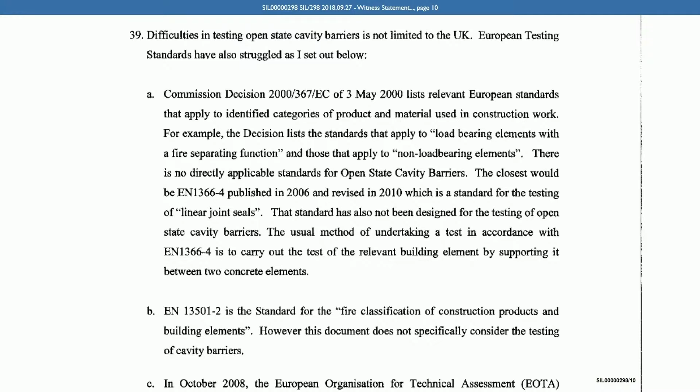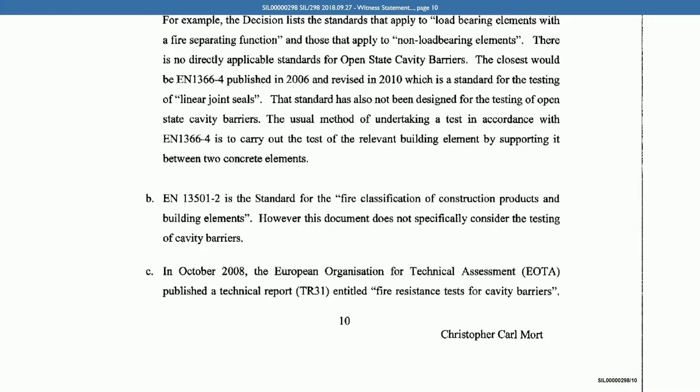I wanted to look at what you say at subparagraph C. You say, in October 2008, the European Organisation for Technical Assessment, the EOTA, published a technical report, TR31, entitled Fire Resistance Tests for Cavity Barriers. As I understand it, TR31 was written because there was no relevant standard for testing cavity barriers. However, that standard, you say, excludes open state cavity barriers. It states at section 1, this method is not applicable to horizontal cavity barriers, e.g. rain screen cladding, because it is difficult, if not impossible, to model the correct thermal exposure and boundary conditions in a fire resistance type test. Such tests should be considered as part of a facades test.

Now, is that the view of Siderise, that it would be difficult, if not impossible, to model the correct thermal exposure and boundary conditions? That is the opinion of the EOTA committee that wrote the TR31. Members of the TR31 committee were also members of the ASFP, who were involved in writing TGD 19.

The difficulty goes back to the fundamental principles of having an open gap on a furnace. How do you measure the temperature above that gap in order to keep the pressure and the temperature in the furnace balanced to allow it to follow the time temperature curve? Yeah, that is the issue.

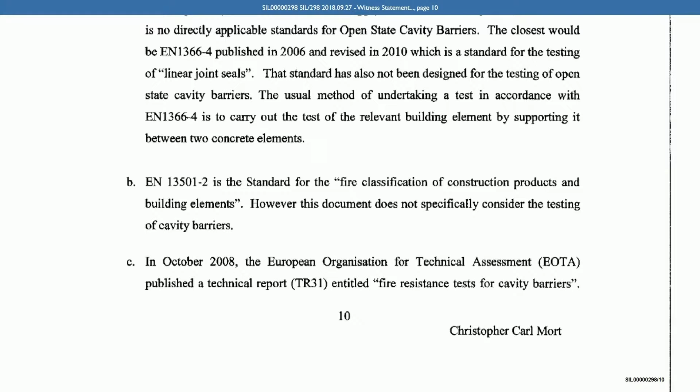Just purely to temperature exposure. Well, let's just go back to that bit of your statement. What's being said there, if we go back to the previous page, bottom of the page. So you say in October 2008 the European Organisation for Technical Assessment published a technical report entitled, and there's the report, and then we go back over.

As I understand it, it was written because there was no relevant standard for testing cavity barriers. However, it excludes open state, and it states at section 1, this method is not applicable to horizontal cavity barriers, e.g. rain screen cladding, because it is difficult, if not impossible, to model the correct thermal exposure and boundary conditions in a fire resistance type test. Such tests should be considered as part of a facades test.

So taking that in stages, did Siderise agree that it was difficult, if not impossible, to model the correct thermal exposure and boundary conditions in a fire resistance type test? No. And why did Siderise take a different view? This was the view of a European committee who were not aware of tests that would be undertaken in the UK in terms of trying to develop products.

Once intumescent reacts and closes the gap, then in effect that is a full seal. Then the full furnace conditions can be controlled.

I see, so Siderise thought it would be possible. Yes, if you ignore the first few minutes of the test, to model the correct thermal exposure and boundary conditions in a fire resistance test? You don't ignore it, everything's recorded from time zero. So it's not ignored, because if it was ignored, then they wouldn't be putting the insulation integrity result on the test report.

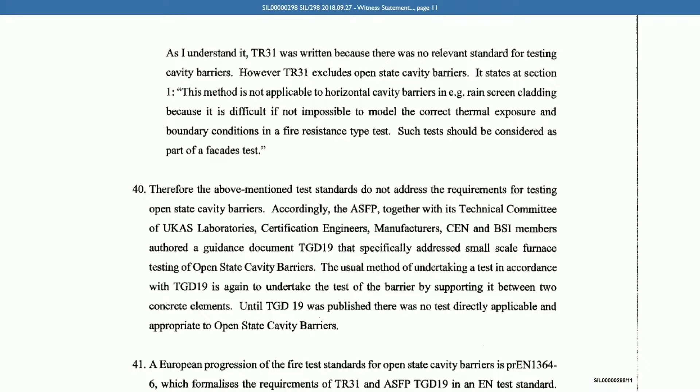However, you need cavity barriers in an 8414 test in order for an 8414 test to function. Well, even though they're not measured, they need to be part of the test in order for the test to function. Yes, I understand that. But going back to what the European committee, or the European Organisation for Technical Assessment — what did you understand them

to mean when they said such tests should be considered as part of a facades test? Forget 8414 for a moment. What did you understand them to mean by that? That you can't just take a furnace test for a product. You need a furnace test and possibly a full facade test, although through EN standards, there are no facade tests yet. There still aren't. I understand that, but I think you've just agreed that what they're saying is you can't just take a furnace test for a product. You need the furnace test and possibly a full facade test, yes?

But then the failure criteria of a facade test is nowhere near the level of performance of a furnace test. So therefore, a cavity barrier that passes a furnace test can be safely assumed to not be detrimental to the performance of a full system test. Yes, I understand that. If you think of them referring to a facades test as being an 8414 test, is that what you understood them to mean? Did you ever clarify that? I didn't clarify that, no. Right.

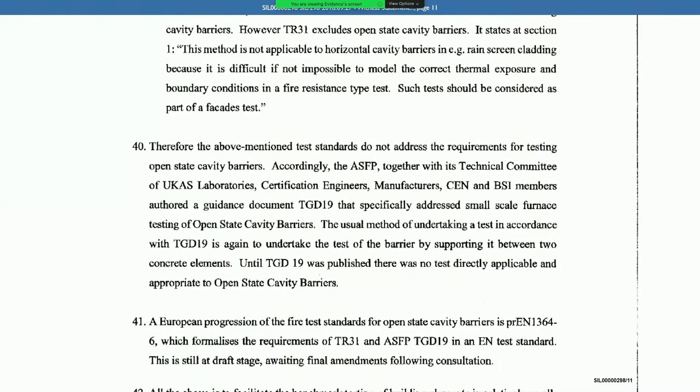Now, if we go to paragraph 40 of your witness statement, you address TGD 19 — this new... new guidance rather than a test. On page 11, yes, sorry, new guidance. You say: therefore, the above mentioned test standards do not address the requirements for testing open state cavity barriers. Accordingly, the ASFP, together with its technical committee of UKAS laboratories, certification engineers, manufacturers, CEN and BSI members, authored a guidance document, TGD 19, that specifically addressed small-scale furnace testing of open state cavity barriers.

The usual method of undertaking a test in accordance with TGD 19 is again to undertake the test of the barrier by supporting it between two concrete elements. Until TGD 19 was published, there was no test directly applicable and appropriate to open state cavity barriers.

Now, in terms of that group that authored TGD 19, you talk about the fact it included UKAS laboratories, certification engineers, manufacturers, etc. Which manufacturers were part of that group? Siderise, Hilti, Rockwool, Firetherm, Firestop It, Promat.

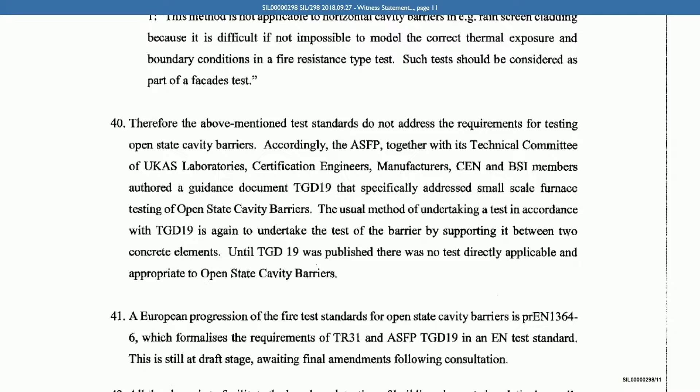Yes, and can you explain exactly what type of small-scale furnace testing was selected for open state cavity barriers? When we say small scale, we are still talking about a significant major test. It's small scale compared to a 10-meter high 8414 test rig. It's still at least a 1-meter or 1.2-meter cube gas furnace that gets up to temperatures of 850 degrees over 30 minutes, and 1,000 and 1,100 degrees over 2 hours. Even though it says small scale, they're still major tests.

I see. And can you explain why that form of testing was considered appropriate by this group? Because it gave clarification to the performance of the cavity barrier in isolation.

So if you've got manufacturers A, B, C, D, E, everybody tests the same principles on there, and A, B, C, D, E all get 30 minutes on there, then it gives more clarity to the market as to the performance of those barriers, because they're all following the same standard, same guidance.

Yeah. And you say in that part of your statement, I just read it out, that the usual method of undertaking a test in accordance with TGD 19 is again to undertake the test of the barrier by supporting it between two concrete elements, yes? Yes. You described that as the usual method.

How many methods were there of undertaking a test in accordance with TGD 19 when it came to the barrier's supporting elements? You had concrete to concrete in there, and also you could erect a timber substrate protected with cement particle boards, which the barrier would be fixed through, but the intumescent would still exfoliate to concrete.

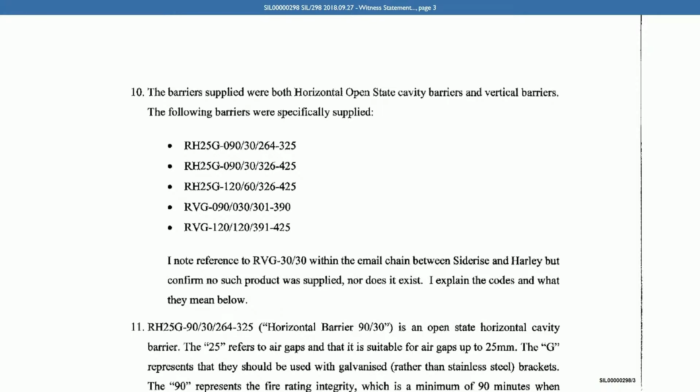Now, if we go back to the test report we were looking at, SIL00000212, page 2, we can see, sorry, it's actually the 3rd paragraph down in that part of the page, beginning specimens A to C. Basically, we get various dimensions of cavity barrier given in this section.

And specimen A, they're all foil-faced rock fibre lamella rain screen cavity barrier. And they give the reference, which had a nominal density of 75 kilograms per meter cubed and overall dimensions. And then we get the dimensions of 275 millimeter wide by 1200 millimeters long and 120 millimeter thick. That's specimen A, 90 millimeter thick specimen B, and 75 millimeter thick specimen C.

Mr. Swales has confirmed at paragraph 51 of his witness statement that the two types of horizontal cavity barrier that were used on Grenfell Tower were specimens A and C. Does that sound right? Yes. Yeah. So specimen A was 120 millimeters thick and specimen C 75 millimeters thick.

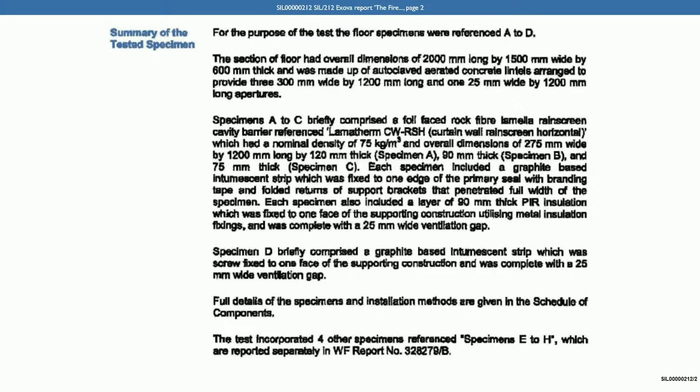Now, if we turn on to page 31 of the test report, I want to look at the section headed integrity first at the top of the page. It says there, it's required that the specimen retains its separating function without either causing ignition of a cotton pad when applied as specified in EN 1363 part 1, 2012, or resulting in sustained flaming on the unexposed surface. And then these requirements were satisfied for the periods shown below.

And then it says technical failure of the integrity of specimens A to D were deemed to have occurred at the start of this test due to the open void required for such seal types. However, following expansion of the intumescent layer, full closure of each cavity was deemed to occur between 1 minute and 4 minutes 38 seconds. Now, just on that, can you help us with why the intumescent layer was deemed to have closed the cavity at these time periods?

I would need to see the suspended thermocouple data for each of the cavities, which are an appendix to this report. In the ASFP TGD 19, there is a requirement that whilst it's accepted that the thermocouples that are suspended may peak over the 180 degrees in the first initial lighting of the furnace, they drop back very rapidly. From the thermocouple data, you'll be able to establish not only when the insulation criteria is re-established, but when the integrity criteria is established. Because as soon as that drops below 180 degrees, then the integrity is there.

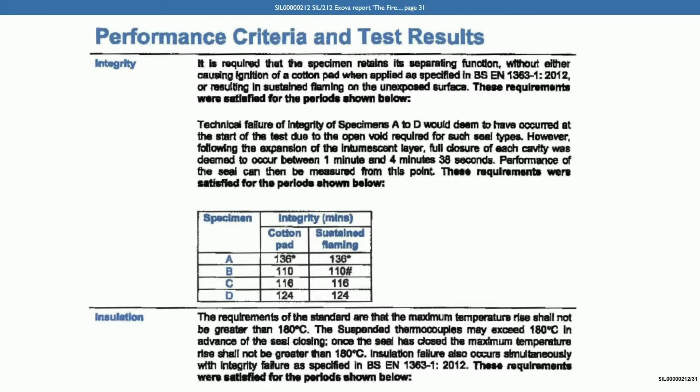And then looking at the two tables on this page, looking at this table for integrity first, we're concentrating on specimens A and C. These are the barriers that were used at Grenfell Tower. Specimen A achieved 136 minutes integrity, and specimen C 116 minutes integrity. And then if we look down to the table below, which deals with insulation, we can see that specimen A has achieved 81 minutes insulation and specimen C 57 minutes insulation. Is that right? Yes.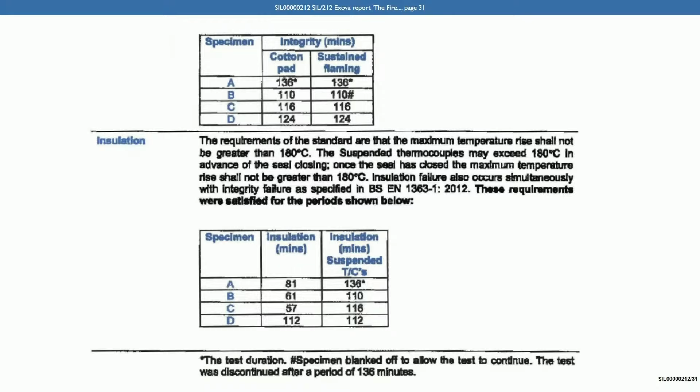And if we turn to page 32 under ongoing implications, we see the limitations section. And again, we see very similar, in fact, identical limitations to those that we saw in the earlier Warrington Fire test reports, yes? Yes. So the results relate only to the behaviour of the test specimens under the conditions of this test. They're not intended to be the sole criteria for assessing the potential fire performance of this element in use, nor do they reflect the actual behaviour in fires.

They may not be applicable to situations where joint widths, depths, orientation, supporting construction may vary. And it also makes the point that there was no movement induced. So it's not telling you about how they would perform where movement is induced in a building under actual fire conditions.

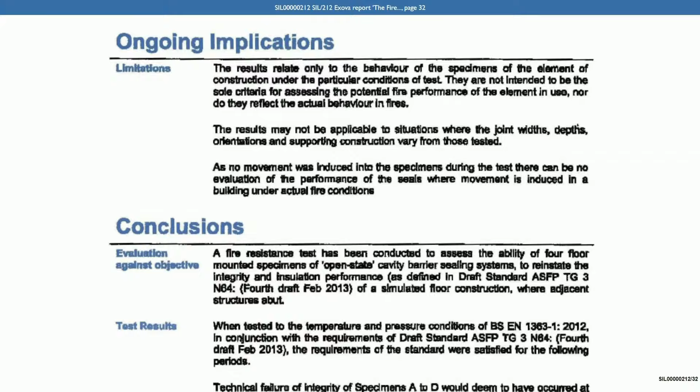And then if we go to page 34, we can see there's a heading on this test report headed field of direct application. And it says that the results of the fire test are directly applicable to similar constructions where one or more of the changes listed below are made. A, increase in the thickness of the cavity barrier, decrease in the distances of fixing centres, decrease in the width front to back of the air gap. And then D, void sizes can be interpolated between minimum and maximum voids. And then E, if a single void size is tested, the result is only applicable to that void size. Do you see that at E?

Yes. And again, did you note and understand those limitations of this test reporting at the time? Yes, because that is a direct field of application applicable to that test report only. And did you make your colleagues in the sales and marketing team at Siderise aware that the results of these tests were only applicable in those circumstances? They would have been aware, yes. When you say they would have been aware, what makes you say that? Well, the test reports would have been reviewed by the Siderise team. Including all of those in the marketing team? Yes.

And then next to the heading, so directly underneath that, if we go back to that page, under the heading supporting construction, it says the test results obtained with autoclaved aerated concrete standard supporting constructions apply to concrete blockwork and masonry separating elements of a thickness and density equal to or greater than that tested. Do you see that? Yes.

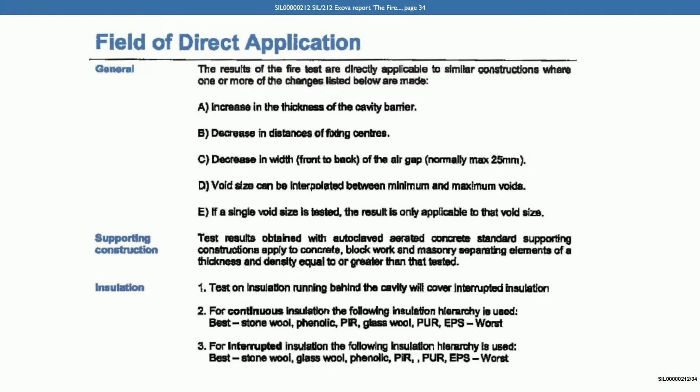Yes, thank you. Now, returning to Mr. Swales's witness statement, paragraph 50, page 13, that's SIL00000306, page 13. So when discussing this draft standard, we looked at this part earlier. He says that it was tested to the temperature and pressure conditions of BS EN 1363 part 1. Can you just explain to us precisely how that testing used the temperature and pressure conditions of that European standard? Okay.

BS 476 part 20 and BS EN 1363 part 1, both those documents utilize what they call the cellulosic time temperature curve. When you're dealing with fire testing, there's three major time temperature curves. There's a slow burn time temperature curve, which maxes out at around 650 degrees. Then there's a cellulosic time temperature curve, and then you have the hydrocarbon temperature curve, which is extreme for oil refineries, oil rigs, etc. So the cellulosic curve also is known as the ISO 834 time temperature curve. So both BS 476 part 20 and EN 1363 part 1 use ISO 834 time temperature curve.

Yes. That's a logarithmic equation. It can be looked up in any of the standards, but it's basically temperature is equal to a log of time plus temperature rise, and it plots out and controls the furnace in the graph. In terms of pressure conditions, both 476 regimes in all guises for fire resistance test and EN 1363 part 1, you have to establish 20 pascals plus or minus 3 pascals, 100 millimeters below the seal that is being tested. Now that gives you a positive pressure on the furnace.

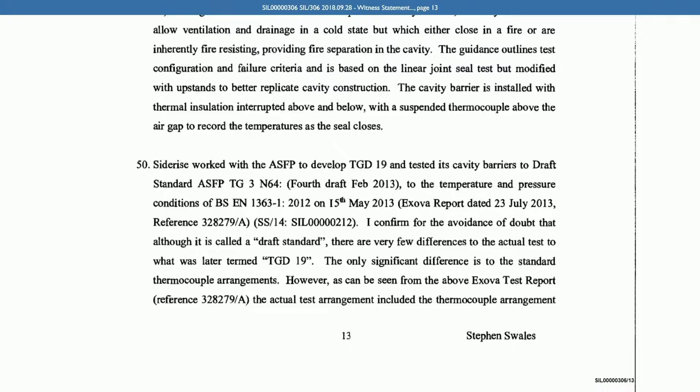In the very early draft, from memory, we didn't have any further thermocouples on the insulation above the cavity barrier. However, on our test, and it went forward with the final draft of TGD 19, where you're using thermal insulation above and below a cavity barrier, the thermal insulation directly above the cavity barrier also had thermocouples affixed to it. I see. To measure the performance of that, so that if at any point the cavity barrier started to break down where it butted the concrete on the back wall, so not where the intumescent is, on the opposite end of the seal, there could have been a potential route for fire to pass up the back of it. So by having the thermocouple on the insulation, you could measure that also.

I see. So I think you're saying the final test standard had an additional location for thermocouples. You'd already got a thermocouple in the gap, and you've explained how you treat the temperature that thermocouple detects. You've got a thermocouple on top of the barrier on the unexposed side. And then the final version of the test also included a thermocouple in the insulation itself. In reality, you would have somewhere on the specimen itself, so including insulation, cavity barrier, air gap, around 10 thermocouples. Right. You would also have thermocouples on the concrete, measuring the performance of the concrete as well. Yes.

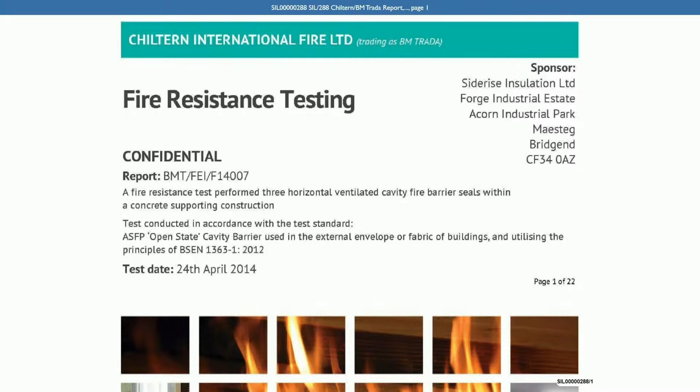And we can see below that, it says test conducted in accordance with the test standard ASFP open state cavity barrier used in the external envelope or fabric of buildings and utilizing the principles of BS EN 1363 part 1 2012. So just for clarity, was that the TGD 19 test? Yes, it was. And then if we turn to page 4, we can see under the description in section 3, at the bottom there, description of supporting construction.

It says the supporting construction comprised 150mm thick, lightweight, aerated, reinforced slabs built on top of a 1,500mm squared furnace. And it says the exposed area of the supporting construction included 3 apertures, 300mm wide by 600mm deep by 1,300mm long, exposed to the fire to accept the cavity fire barrier seals. So again, a familiar construction in terms of the test apparatus, yes? Yes, it's a standard construction offered by all test labs right across the world. And the barriers are being tested between aerated reinforced concrete slabs, yes? Yes. And they were constructed to provide 300mm wide voids into which the barriers were placed, yes?

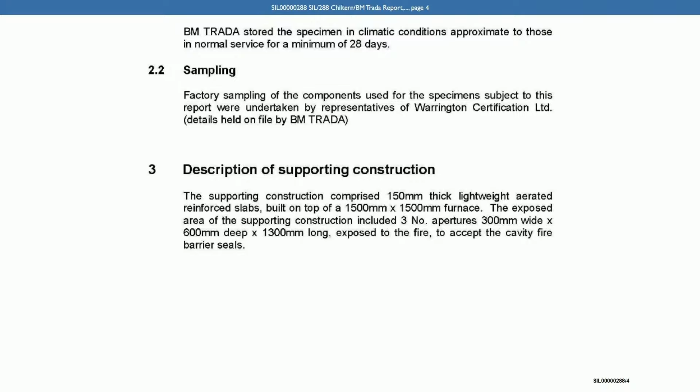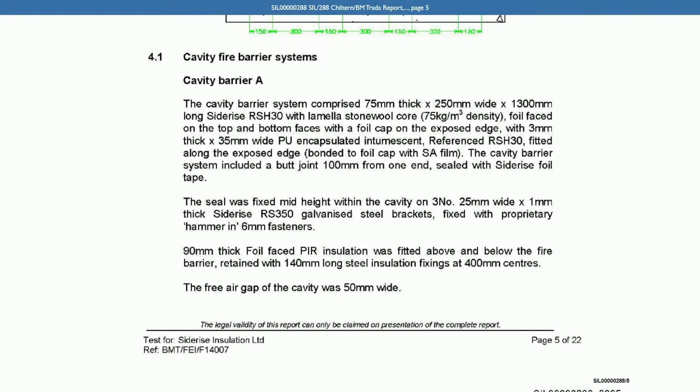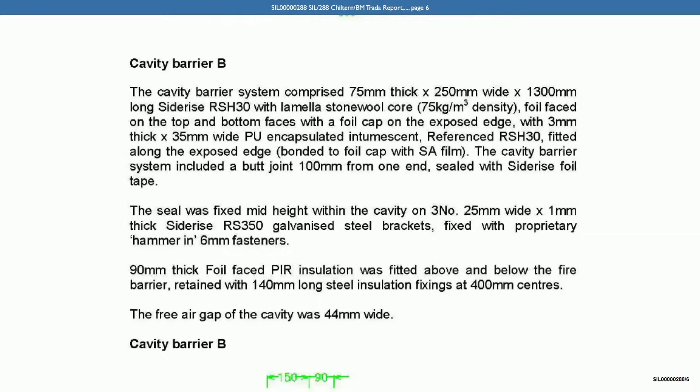Yes. And then if we go to page 5, under section 4.1, at the bottom of that page, we can see that cavity barrier A, we only need to look at the end of this, had a free air gap of the cavity 50mm wide, yes? You see the very final sentence, the free air gap of the cavity was 50mm wide. Yes. And we can see page 6, cavity barrier B, at the end of the text, had a free air gap of the cavity of 44mm wide. And then at page 7, cavity barrier C also had an air gap of 50mm wide. Is that correct? Yes.

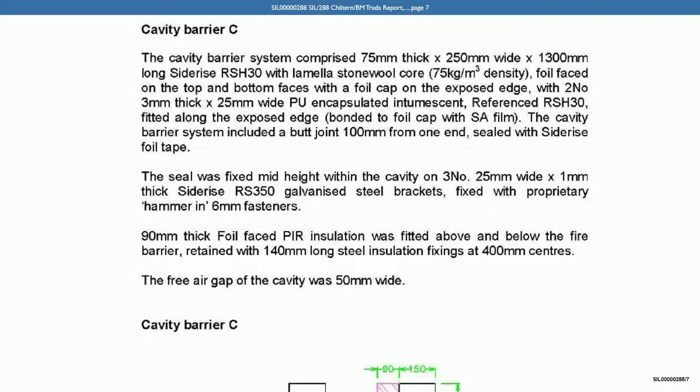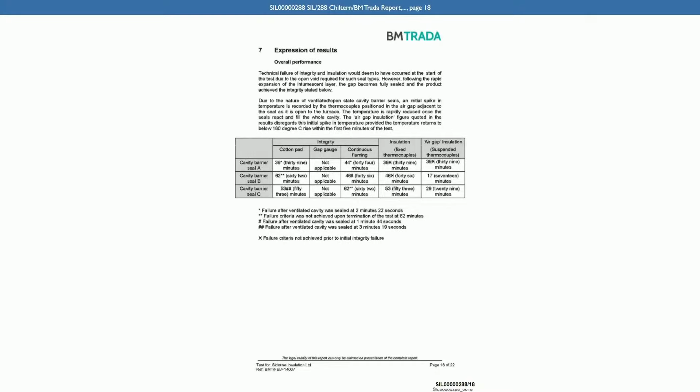So in April 2014, Siderise were testing its cavity barriers to this standard with air gaps of up to 50mm, yes? Yes. And then if we go to page 18, this is where we get a section called expression of results. The first paragraph says technical failure of the integrity and insulation would be deemed to have occurred at the start of the test due to the open void required for such seal types.

However, following the rapid expansion of the intumescent layer, the gap becomes fully sealed and the product achieved the integrity stated below. And then it goes on: due to the nature of ventilated open state cavity barrier seals, an initial spike in temperature is recorded by the thermocouples positioned in the air gap adjacent to the seal as it is open to the furnace. The temperature is rapidly reduced once the seals react and fill the whole cavity. The air gap insulation figure quoted in the results disregards this initial spike in temperature, provided the temperature returns to below 180 degrees C rise within the first 5 minutes of the test.

Do you see that? So, yes. So that is quite a good description, isn't it, of how this test is attempting to take temperature readings given the initial spike in temperature that's experienced, yes? Yes, and also this test, as in the previous pages, you will see it has PIR combustible insulation above and below the seals. So at any point during the test, should the combustible insulation above the cavity barrier catch fire or increase its temperature above the 180, then it's a fail. So it also measures that element.